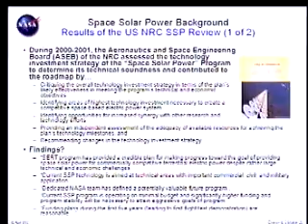A quite significantly different result than had occurred in the 1979-1981 timeframe. In particular, the National Research Council, the Aeronautics and Space Engineering Board, looked at the overall technology roadmap. They did not consider whether there is a market for solar power satellites, or an in-space market for high levels of solar energy in the Earth's neighborhood or the inner solar system.

They only looked at the credibility, the feasibility, the kinds of cost numbers, the programmatics of the strategic research and technology investment portfolio that we had articulated, with this steady stepwise progression of clearly identified and individually valuable demonstrations over the next decade or two. Their findings were that it was in fact a credible plan, that it did allow you to make progress towards the goal of power for terrestrial markets, and that it did so in such a way that it had significant, potentially important applications with civilian,

military, and commercial applications, and that a flight demonstration was a reasonable way to focus the conclusion of each round of technology research and development. That is, rather than making progress in the laboratory indefinitely, at the end of each cycle of innovation you should pull these new technologies together, put up or shut up, and get them into a flight demo at increasing levels of power and increasing levels of technology.

So where are we in terms of achieving the goal of terrestrial power? Where we are at the moment is basically far from it—that is, achieving power at a competitive price. Now, this is setting aside the question of whether or not over the next several decades, due to a variety of factors, the cost of energy were to somehow become significantly higher.

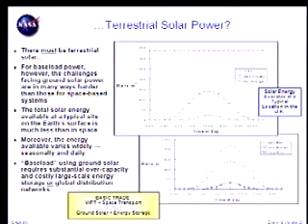Terrestrial power, solar power, there's the argument associated with the insolation. This is all going to be in the package that you'll have available on the website, so I won't go into it at length. The basic argument being that if you can compete effectively with terrestrial energy storage, then solar energy from space becomes a viable candidate. And if terrestrial energy storage becomes dramatically less expensive, then you don't. And that's just a straightforward trade.

Low-cost launch, this is another discussion for the break. The fundamental issue with any transportation infrastructure is traffic. If you have only one car going across the Golden Gate Bridge, you can't afford it. And so it's a chicken and egg situation.

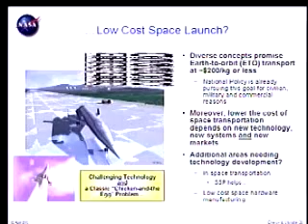You never have low-cost launch without large markets. You never have large markets without low-cost launch. We believe the stepwise strategy that we've envisioned, in fact, goes some direction to getting to an evolutionary path that gets us to the chicken and the egg more or less simultaneously.

And the safety of power beaming, you can't see this very well. We're continuing research here. So far, all of the studies suggest that microwave transmissions from space are dramatically less dangerous than sunlight. Certainly the wavelengths are such that you don't induce bond breaking, and you don't get cancers induced. You get thermal effects if you're at the center of the beam, which you can protect from.

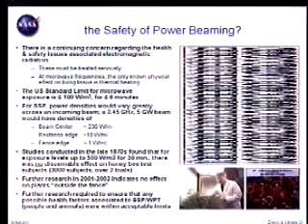At the edge of the beam, the power levels are well below the U.S. safety limits, most of the international safety limits except for Russia. And we're continuing research. Basically, the studies so far suggest that for both individual fauna and flora, that there are no noticeable effects due to the microwaves, other than the fact that the flora like it. They grow more quickly.

So there's a lot of work has been done. There'll be more material in the backup charts that you can take a look at. It does appear that technically space solar power is quite viable, providing extraordinarily large, certainly hundreds of gigawatts, potentially many terawatts. Depends on the size of the transmitting system and the type of orbits that you can place it in. We've made a lot of advances since the 1970s.

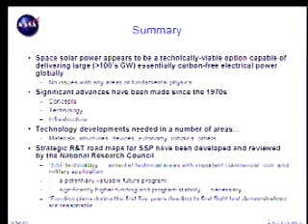We believe that there are very strong space applications for the component technologies and the systems which lead to an evolutionary roadmap that might in fact allow us to get to the point, not today, not in 5 years, not in 10 years, but at a point in the future where we could in fact decide whether or not these were systems that we wanted to add to the energy mix during the coming century.

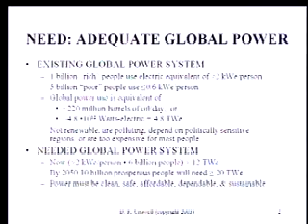Right now, we have an existing global power system that supplies 1 billion rich people, we're rich, with the electric equivalent of about 2 kilowatts electric per person. That leaves the other 5 billion poor people with about 0.6 kilowatts electric per person. This is equivalent, when you multiply out all those numbers, to about 220 million barrels a day of oil, or about 4.8 terawatts electric. And I'm just using a factor of 3 conversion from thermal to electric.

What I'm trying to do is put as much of this stuff in the same set of units as possible, to reduce billions of barrels and millions of cubic feet, and all those conversion efficiencies, down to a common term: terawatts electric or terawatt electric years.

Now, the problem with the existing systems is that they're not renewable, they are polluting, they depend quite often on politically sensitive regions, and they're too expensive for 5 billion people.

A needed global power system is one in which we provide at least 2 kilowatts electric per person. So right now, 2 kilowatts times 6 billion people gives you about 12 terawatts electric. A terawatt is 10 to the 12th watts.

So we have a problem right now. We've actually had a problem for 100 years. By 2050, with 10 billion people, we may need well in excess of 20 terawatts electric. This is about a factor of 2 more than the largest number you've seen so far from Marty Hoffert and others who work on derived data from IPCC or from the World Energy Council reports.

Now, this power must be clean, it must be safe, it must be affordable, it must be dependable, it must be sustainable. That means century after century after century, you've got to keep supplying it.

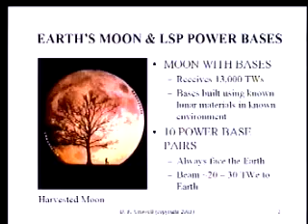They would be built in pairs on the two edges of the moon, so one or the other was sunlit. During a new moon, you would provide power by having power lines across to the back side of the moon, about 500 kilometers to the far side, where you'd have photovoltaic arrays connected by power lines bringing power back to the earthward side. That way you'd have continuous power out of one side or the other. The only time you're out is during a full eclipse of the moon by the Earth.

The same face of the moon always faces the Earth, so these arrays can be relatively static. I'll get into their nature, but this would be an example of a harvested moon. The bases are built using known lunar materials in the known environment.

Now, going from the Earth and looking to the moon, and looking back from one of those bases to the Earth, the Earth always stays within a couple of Earth radii of the same location in the sky. So the Earth is more or less fixed in the sky.

A given base is composed of a power plot. A power plot is composed of solar arrays—that's number one—which might be the area of the size of this room, as in the prototype model I'll be talking about in the next few minutes. These arrays would be sitting directly on the lunar surface.

You've got no air, no water, no chemicals to attack them, so things a fraction of the thickness of a sheet of paper can last there for decades. But you're building essentially very thin films directly.

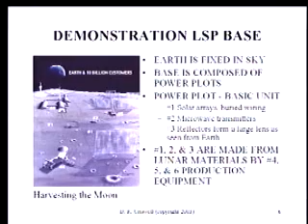The bottom line from that was that, assuming the same operating technologies as the 70s power satellites, you produce 50 times more installed power than you did shipping satellites up from Earth. So a factor of 50 advantage in productivity makes the whole thing much more interesting.

Now the next slide I'm going to show you goes past the demonstration, and assumes that since you now have access to substantial electric power on the moon in various locations, and the ability to work with the common soils and metals in them, the glass and the production, with careful industrial design you can design the production equipment so you can make about 90% of that out of local lunar material.

This is the second step up, and what's important about that is it lets you get into exponential growth. A ton of material taken from the Earth to the moon in the form of production machinery and manufacturing capability then results in several thousand times more energy delivered over a life cycle back to Earth.

Now we've modeled this in terms of a life cycle for a power system. We took, from the first, a relatively long view.

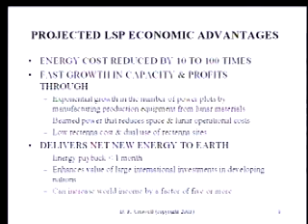It would enhance the value of large international investments in developing nations, because you would now have the energy to start creating wealth—somewhat like what happened with TVA or Bonneville in the U.S. back in the 30s. And if you can increase wealth in direct proportion to the amount of electric energy you bring in, it's reasonable to expect world wealth to increase by about a factor of 5 by 2050.

Considerable environmental advantages to this. There's absolutely no greenhouse gases, or essentially trivial amounts. Fuel spills, nuclides, dust, industrial waste—they're just not there. It eliminates the need for hazardous facilities. The rectennas themselves are aluminum and silicon, and can certainly be recycled if you have to get rid of them.

This is extraordinarily important as we are now a race that operates on a global scale. 20 terawatts is equivalent to 60 terawatts thermal. The geothermal output of the entire Earth is only 30 terawatts. We actually move more material by man's actions than nature does—Mount St. Helens, when it blew, was equivalent to 6 weeks of industrial output of terrestrial society.

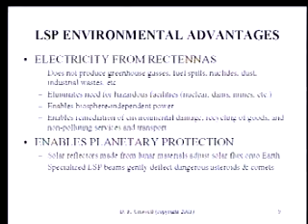It then enables us to have a source of power that is independent of the biosphere. This, with access to independent biosphere power and net new power, enables us to remediate past environmental damage, the actual clean recycling of goods, non-polluting services and transportation, and it enables planetary protection. I won't get into that right now.

There are very interesting possibilities with respect to nanotechnology and energy in this. First, addressing the terawatt barrier: the moon has a potential of 13,000 terawatts, and I think we can tap more than a terawatt electric within 15 years. We thought of this back in the late 70s, early 80s, and it was clear to us that there were no technology barriers.

It's basically an interesting industrial engineering challenge of producing thin masses on the moon, and then later getting into the manufacturing of production equipment on the moon. That gets you into exponential growth.

Nanotechnologies may enhance this growth rate and lower the transport costs. Tethers are a point of particular interest for low lunar orbit to moon transport. Another interesting aspect of this is that space and the moon provide a safe environment within which to demonstrate nanotechnologies without worries about biological interactions.

Cost issues—well, I see this as analogous to what the U.S. has been doing for many years, from when George Washington built the first canal out to his property. The government must return to the moon. We could certainly do that within 8 years with a focused, disciplined program. It would be like putting in the interstate highway system.

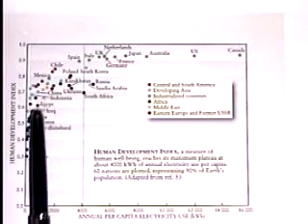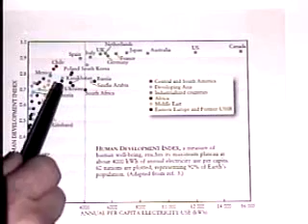This provides context relevant to looking at the upside of nuclear power. What this shows, a bit hard to read, is basically the United Nations Human Development Index, an indicator of quality of life, plotted against annual per capita consumption of electricity. The message is that above around 4,000 kilowatt hours per person per year, one sees essentially the OECD, then with a steep decline below this plateau, one sees the rest of the world, with gradations from China at about 1,000 down to Ethiopia approximating 0. The message of the next 50 years is presumably to see these countries marching up this curve towards a higher Human Development Index. However, as they march up that curve, there are a lot of people in this part of the curve—China, India, Indonesia, Yemen, number 18 in the UN projection for 2050, et cetera.

As they march up, it would be not very sensible to treat all of them in the same way as candidates for being part of the expansion of nuclear power. So as I come to discussing what we believe is a rational scenario to address the terawatt challenge with nuclear fission power.

We can't discuss all of this, but we will be having a scenario that folds in many factors, including urban population, technical infrastructure, opportunity for the kind of capital investment required in nuclear power, et cetera.

Now, the terawatt challenge for nuclear fission power, if we take a terawatt of electricity capacity, I want to stress that is approximately maintaining market share, global market share for nuclear power. Let's call it 20% plus or minus a bit. So we're talking about market share preserving if we're going for a terawatt.

We've heard a couple of speakers, most recently Nate, talk about 10 to 30 terawatts. I will be stating as a conclusion of our analysis that we don't believe that, even though it does not violate the laws of physics as perhaps some other technologies he discussed did, it violates various laws of economics, et cetera. In fact, we will argue that a terawatt scale, maybe 1.5 terawatts, is about the maximum that you can actually imagine happening.

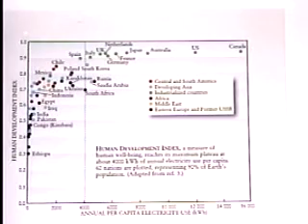So the terawatt challenge in nuclear power is a little bit different in a certain sense. We will argue it's a scale at which one does have a reasonable impact on important problems, avoiding a reasonable amount of carbon emissions, for example. On the other hand, we will also argue that you really can't expect to do more than that, even if you ever reach that kind of scale. So that's part of the context.

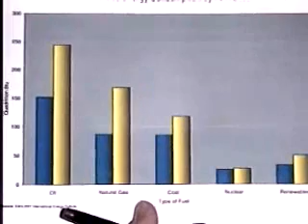With regard to the market share argument, let me remind you of world energy consumption by fuel source. This is hard to read, but it's fine. Bottom line is, I'm just repeating things you've heard in different ways. The non-carbon sources today, the blue bars, are about 15% of global energy use.

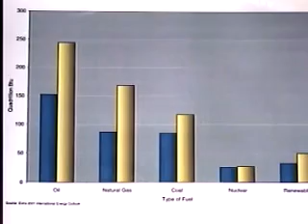If one takes as a guiding framework that, say in 2050, one has twice the primary energy use, which probably is on the low side of the scenarios, and that fossil fuel use cannot exceed where we are today in terms of various stabilization scenarios, roughly speaking, then you see immediately we're talking about an order of magnitude increase in non-carbon sources. That's the kind of challenge we're talking about.

And I'm not going to be arguing that nuclear fission is the answer for that gap, but as a contributor, a non-trivial contributor, potentially. That's kind of the framework for the discussion.

Now, let me turn back briefly to this issue of the demand map, where, as one looked at that first curve, as countries move up that curve in terms of providing more electricity to improve the quality of their lives, their economies, et cetera, where might that be? I will not be able to go through the analysis supporting this other than to mention various factors involved. But there's often stated the idea that somehow a major global expansion of nuclear power in the next decades would see nuclear power proliferating all over the developing world. The fact is, when you look at it, that is not a credible scenario.

This is one scenario for the terawatt electric, and what you see is, frankly, there's no way the world's going to reach a terawatt if the USA isn't driving the train. Developed world and FSU, about two-thirds in this scenario, about two-thirds of the capacity. Developing world, the remainder. China and India, the big horses in the developing world. And then in this scenario, about 100 gigawatts - Indonesia, Brazil, Mexico, South Africa, Algeria, et cetera.

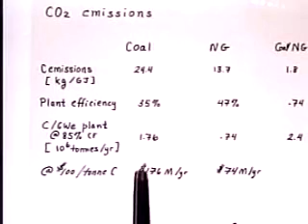That's the scale. So in the terawatt scenario, if you're looking at coal as one of the major elements of growth in electricity over the next half century, you'd be talking about 1.8 gigatons, and if it were gas, 0.75 gigatons - you can dial whichever linear combination you wish in between. So that's the scale in terms of carbon displacement in that terawatt scenario.

Okay, so how do we get there? What's likely to drive one there? Well, first of all, a factor which was not highlighted consistently in many of the technology discussions as primary is economics. It's very important that we look at the economics.

Now, what I'm going to present is the result. Nate showed a price of electricity per kilowatt hour of nuclear at 2.3 cents - that is true today because of amortized plants. The relevant issue here is what is the cost, in a merchant plant model, of building a new nuclear, coal, or gas plant.

Now, I won't go through all of this, but let me point out a few key parameters. Probably hard to read, it's okay, I'll tell you what's important here. These are our base case input parameters for nuclear, coal, and gas. There are several important issues here to which I will return.

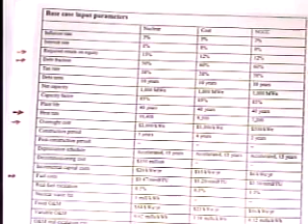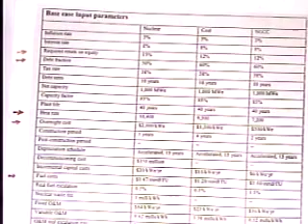Number one, capital costs - the overnight costs. I want to stress this is based upon research and hard-nosed experience, not upon promises - neither promises of the NEI for nuclear, nor your favorite coal person for IGCC or anything else. This is experience. Maybe one can beat this, but let's start with experience.

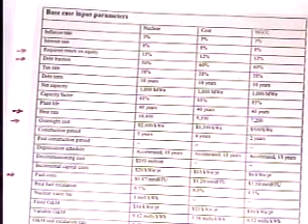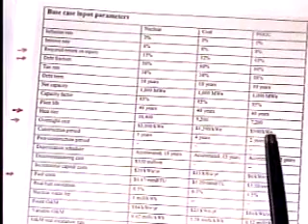Overnight costs: nuclear plants, $2,000 per kilowatt - considerably less than the Japanese have spent for their last plants. One plant may have beaten this, the Koreans - exchange rates come in, but it's fair to call their last plant as built at around $1,700 a kilowatt. We have gas at $500 a kilowatt for a combined cycle gas plant, and coal at $1,300, including all environmental cleanup equipment other than carbon, all the standard pollutants.

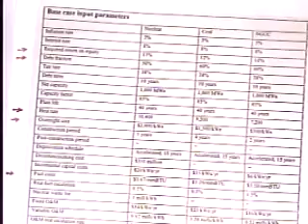Capital costs are a big issue for nuclear power. Fuel costs - I won't go through in detail, but it's the opposite: fuel costs for nuclear power are extremely small. Heat rate is unfavorable again to nuclear power: 10.4 versus 7.2 for natural gas. In other words, natural gas is about 47% efficient in our calculations, nuclear at about a third.

And finally, very important - if you want to be serious about who's going to give you money to build a plant, what do the bankers or investment community think about the cost of the money? It's not the same for a nuclear plant as it is for a gas plant. So when you look at debt fractions and return on equity, it's unfavorable for nuclear power. All of this is folded into our calculations. So what comes out?

Here's the base case. With those assumptions, nuclear power comes out at 7 cents a kilowatt hour. Pulverized coal, 4.2 cents. Gas at $3.80 over the period of the plant, 3.8 cents.

Gas, of course, has considerable uncertainty. Gas is driven by fuel cost. It's exactly the opposite of nuclear. The gas costs are maybe not something one wants to count on for a 40-year investment in a plant, so there is considerable variability there.

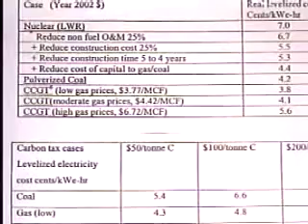Very importantly, if this terawatt challenge is to be met by nuclear, you've got to get the 7 cents down. Here are some steps.

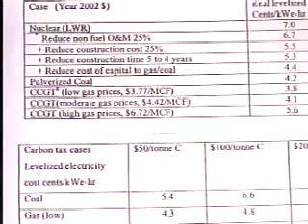O&M, operations and maintenance reduction. What we've put here is actually the current performance of the best performers, so that should be achievable, in principle.

Construction costs, critical. 25% reduction to $1,500 - very important. A big drop in the costs.

And then finally, the cost of capital. If the cost of capital for nuclear power were the same as for gas and coal, it makes an enormous difference. With those, you could be down to 4.4 cents.

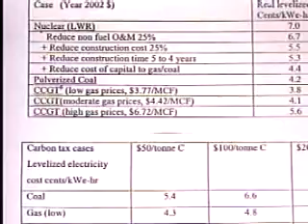So these are very important economic issues that are going to determine much of the nuclear power trajectory. Another one, of course, is the externalities, as we have discussed, in carbon.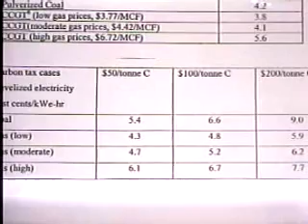If you now put carbon, however you do it - I don't care what the mechanism is - but if in the end you end up paying somewhere between $50 and $200 a ton of carbon, not carbon dioxide, of carbon, then as you can see, the coal and gas prices are impacted significantly.

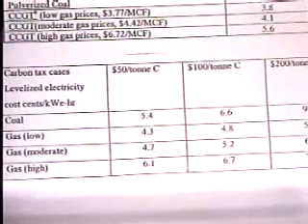Bottom line is, there are a lot of uncertainties here. Nuclear power might be in the game as a serious economic competitor in terms of at least life cycle costs if the nuclear community works hard at capital costs and can get some confidence in the investment community, and particularly if carbon externalities are one way or another put into the equation.

Now, what I said was our study is kind of looking at the issue of costs being critical. How would one enable this? Again, this is not necessarily a statement or prediction of what's going to happen in Congress next year, but how would one enable this?

First of all, look in the context of a carbon avoidance government incentive portfolio. We have tax credits for efficiency, hybrid cars, whatever. We have a program on coal and sequestration, FutureGen plus sequestration. That's what that area needs - a serious research and demonstration plant and sequestration, tailored to that.

You go to renewables, let's say wind - you have 1.7 cents per kilowatt hour for 10 years, which, by the way, is a humongous subsidy. For a gigawatt electric plant equivalent, that's $140 million per year credit.

If you go to nuclear, what one probably needs, if one wants to give this a kickstart, is an upfront cost sharing of what you would call first mover costs. Because right now, there's a good chance those capital costs could be real, but you can't get over the first hurdle to start building a new group.

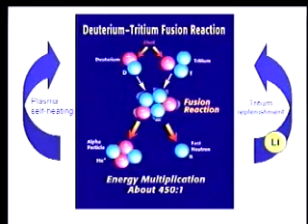So I'll tell you about fusion energy. My particular expertise is in magnetic fusion energy, holding on to hot plasmas with magnetic fields. The basic process most likely to be successful in the nearer term, meaning this century: deuterium and tritium combine to make an alpha particle. That alpha particle has 3.5 MeV, which keeps this stuff hot. They also make a fast neutron. You capture that in lithium, and that provides the tritium, so you have 2 cycles that you need to keep going to make fusion work. And out comes electricity, and perhaps hydrogen, although I don't think that's a near-term option.

So why is it that you would be interested in this? We've heard that there are a lot of disadvantages and problems with all the different sources of energy. Right up front, the problem with fusion is that it is not at this time practical. I'll say that maybe 3 times in the course of this view graph - once at the beginning, once in the middle, once at the end.

But if we can make it practical, it has plenty of fuel. It's available to all nations. There's at least thousands of years' worth of this fuel, probably millions. It has no carbon emissions. The radioactivity, as I'll show you in a view graph, is relatively short-lived. It can't blow up. It's resistant to terrorist attack, essentially because there's very little fuel in the chamber at any given time, and it has very little afterheat.

There's low risk of nuclear materials proliferation - I don't say no risk. You don't need to have any fissionable materials in a nuclear fusion reactor. There are neutrons - you could, in principle, breed nuclear materials, but it would be a matter of kilograms of nuclear materials being detected out of zero, rather than out of many, many tons. So it is a relatively easy thing.

But now this is the time for me to say, it doesn't yet work in a practical sense. It's compact relative to solar, wind, and biomass. We've seen land usage - people seem to think that giving up Arizona really isn't that much of a problem, but you probably ought to talk to the folks in Arizona. It's not subject to daily, seasonal, or regional weather variation, nor does it need to be located near a place where you could sequester carbon dioxide. So that gets you away from large-scale energy storage and long-distance transmission.

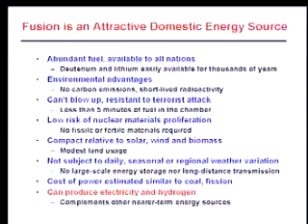We've looked at the cost of power. Of course, this is something that maybe it's like what Ernie was saying - it's a class of something that you can estimate what it could cost if you can do it, and we don't yet know for sure we can do it. But you can get to 5 cents a kilowatt hour kinds of electricity costs. And you could, in principle, create hydrogen - you can certainly create electricity if you can do it. Once again, it complements other nearer-term, now working energy sources.

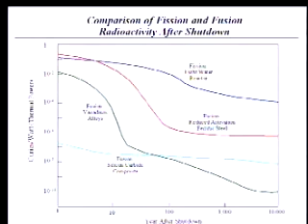Years after shutdown, here is nuclear fission, and you can see that in 10,000 years you get to a certain level that people are beginning to worry about, but you get there in sort of a human lifetime from even the worst of the fusion materials we're looking at. So you've kind of changed all of human civilization timescales into human lifetime timescales.

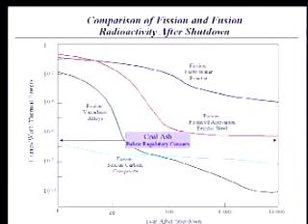And while we're talking about coal ash, it has some radioactivity. Actually, its radioactivity doesn't decay at all in this time period, right? It thinks in millions of years, coal ash. But the radioactivity from the coal ash you're planning on piling behind your power plant is comparable to the radioactivity from fusion, again, in sort of a human lifetime. So you could imagine some local storage, even recycling of these materials, particularly the more advanced materials from fusion. So it's a somewhat different question, I think.

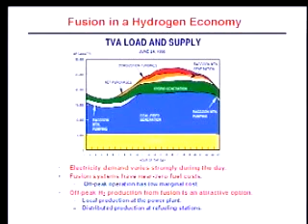Fusion systems have near zero fuel costs. The deuterium and tritium are really nothing. There are parts that wear out. But the off-peak operation therefore has very low marginal cost. And so you can do hydrogen production from the off-peak operation. Say you're operating here conceptually. This is your off-peak production.

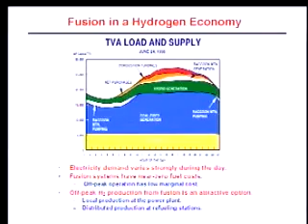You can do local production. You can imagine thermal production, for example, or electrolysis. But actually, I find the most interesting idea, so that you don't need a hydrogen distribution system, is to use the fact that the grid is also not doing too much at that time. Send the electricity out to the, quote, gas stations and make them gas stations where they deliver the hydrogen. And it's a funny sense in which steady things, like regular fission also, can use this idea of hydrogen for peak shaving in the inverse of the way that wind uses it, and in fact, perhaps even more efficiently.

Now, these are charts you've seen many of. This is the anthropogenic emission versus years. This is the buildup of carbon dioxide. It's hard for me to read at this angle. I think this is probably the 550 case. Okay, and you can see it takes sort of 50 to 100 years to level off, a couple hundred years if you get to some of these, frankly, more realistic cases that we're headed to.

There are a couple of different scenarios. The IPCC scenario you saw in a few talks, the WRE scenarios you saw in other talks. What the WRE scenarios do is, they're more economic in that they allow the carbon dioxide to grow a little bit earlier and then level it off harder later. And now you look at these charts and we get ourselves really quite wound around the axle about 2050. Depending which of these curves you take, there's a lot of energy in that difference.

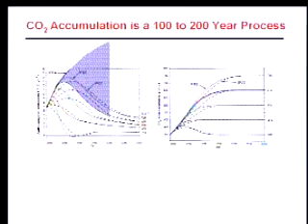But what I want to look at is the longer term picture. And the longer term picture is indeed that there's a big problem in 2050. And this is a 650 scenario. You have to understand that the forcing function is logarithmic in the amount of carbon dioxide in the atmosphere. So 650 is worse than 550. And there's about a factor of 2 difference there, depending on that choice.

And then you can also go down to a larger difference if you choose, for some reason, the IPCC scenario. But all of these, actually, where there is not uncertainty -- Jerry Mahlman, who's director of the Geophysical Fluid Dynamics Lab, or was director there nearby us, pointed out to me -- where there really isn't uncertainty is out here. It doesn't matter what scenario you take, you need just humongous amounts of energy.

So here's a picture. Here's what these look like. This is an economic analysis that points in this direction, that we need to be worrying about this 2050 and beyond kind of timescale. And indeed, here's just a look at fusion. This is estimated total primary energy consumption from the IPCC. I'm including things that are off-grid here to get total energy. If you just say, I want the 650 ppm WRE scenario, you're allowed that much carbon-based energy production at today's carbon intensity, or slightly reduced for this.

And what you can see is that fusion is a little late on this scale. This doesn't come to 10 terawatts. Again, if you take the other scenarios down the chart, you ask for 550, you ask for the less economically attractive IPCC scenario, you can get it up above, a little bit above 10 terawatts. But fusion with a reasonable growth rate -- this corresponds to about 1 in 10 power plants being replaced with a fusion power plant -- grows up here.

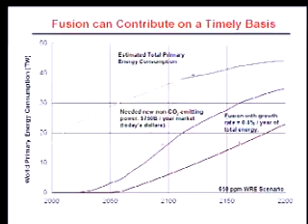Someplace up here, if you're going to contribute this kind of amount of energy, you have to be contributing to transportation. I don't think you're ever going to use electricity for heating purposes - that's really tremendously impractical. But you can make significant contributions if, with nanotechnology and pushing harder than some scenarios we've developed, you move that back a decade, I can meet your 2050 goal on your chart. But I think you also have to think in the very long term, because that's important.

You're going to need concentrated energy sources, because world population growth is going to be in cities and megacities. So what is this all about? What are we doing? Well, as we've heard, the sun is a fusion power plant. It uses gravity to hold this very hot gas together.

In nuclear weapons and in inertial confinement energy, which I won't talk about so much, you use very energetic pellets and very energetic beams to compress a pellet and heat it so that it fuses before its inertia lets it explode - that's why it's called inertial fusion energy.

But what we do in Princeton, and what is the dominant process being looked at for energy around the world in a very aggressive program, is you use magnetic fields which cause hot gas plasma that's been ionized to spiral around that magnetic field. Then you close that magnetic field on itself. The plasma spirals around this magnetic field - it can go for hundreds of kilometers along the magnetic field before it moves centimeters across. It's a tremendously effective way of holding this very hot gas in place.

In fact, we've been to temperatures of about 1 billion degrees Fahrenheit with these gases and held the plasma there at those temperatures for many seconds. So this is a tremendously effective way of making these very hot gases.

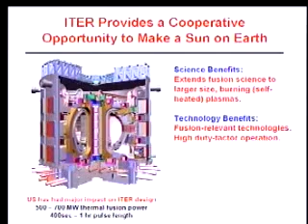So the way that the international folks look at this, the international group working on this that now includes us, is to demonstrate the scientific and technological feasibility. It's not going to show that it's economic yet, by producing industrial levels of fusion power.

So we're very excited about this international opportunity. Where does it stand? Europe, Japan, Russia, Canada have already been negotiating about this. The US and China have now joined. South Korea has made an offer. We'll see whether it's accepted by the whole team. There are 4 sites on the table: northern Japan, Canada near Toronto, Spain, France. With the US and China, and probably now South Korea, the numbers may add up. Europe has talked about putting 53% on the table, and Japan has talked about 17%, and under those circumstances you don't take too much from everybody else to make it work out.

Key issues are to resolve siting and cost sharing. This is a major international construction project. I should talk to my friends from NASA about the ISS. That seems to have been a challenge to keep it on budget and schedule. So that's going to be a major issue. Risk allocation is an issue. How do you handle contingency? Europeans can't translate the word contingency in English into European. So we have some work to do with them, because that's got to be taken very practically.

Now, there's more work to be done in parallel with ITER to make fusion practical. The configuration of ITER is what's called a tokamak. It requires a current to flow in this plasma. You need to come up with ways to drive that in steady state. It also, I showed you, it makes about 500 megawatts. You need a real power plant to be a little bit smaller than that, and to make 2.5 gigawatts if you're going to reach the kind of economic challenges that Ernie talked about. So you need a higher pressure plasma in there, and that's what you get more fusion from. And so there's some work on active instability control to do that we're doing in the United States.

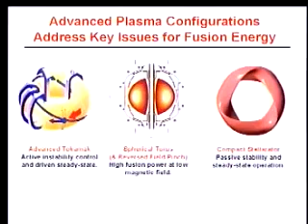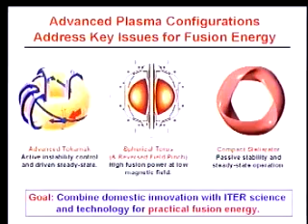So a question you could ask is, gee, if that's what ITER is and you need to look at some other options, why are you building ITER? And we struggled with that. We had one of these Snowmass meetings like the high energy physics people do, following some earlier analyses, a come-to-Jesus meeting. And we struggled with that question, and we argued about it, and the folks who are advocates of these other configurations talked, and we came to the conclusion that if we do domestic innovation along with ITER, then we can get there. And in fact, ITER will provide most of the science and most or all of the technology you need for the other configurations to be able to move forward towards a demonstration power plant. So that was a bit of a struggle, but that was the technical conclusion.

So this range of toroidal configurations is being studied worldwide. Here, I'll only show a few. This is in Europe. You see the man stands about a third of the size of the tokamak in Europe. Here is the tokamak at MIT, and they hire giants there apparently.

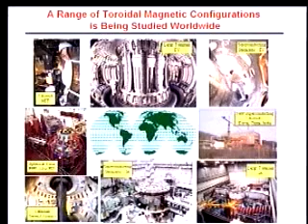Korea, China, and India are each building $500 million fusion facilities. The stellarator, the configuration that varies around the torus, has billion-dollar facilities both in Europe and Japan, plus some nice facilities at Princeton, where I work. I won't get into that.

What are the areas of technology that are critical for fusion energy? Let's start with this hot plasma in the center—that's my job, that's the physics.

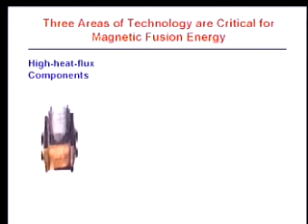But what about what we can do moving outwards? There's heat that comes out—20% of the fusion power comes out in the form of heat. 80% is neutrons that are absorbed in this lithium blanket. 20% comes out as ultraviolet radiation and energetic particles. You have to capture that on the surface.

This is not a very good reproduction, at least from where I stand, of a tungsten mesh—sort of a brush of tungsten that can take 25 megawatts per meter squared in steady state, developed for this purpose. It looks very attractive. You need this tritium-generating blanket.

Out come the neutrons, and you want to absorb the tritium. You want to have things in here like silicon carbide that allow you to run very high temperature coolant, say lead lithium. You've got to have a system where the parts damaged by the neutrons can be switched out quickly, and you want it itself to have low radioactivity.

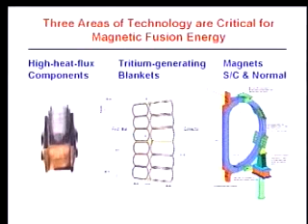And finally, as you work your way out in magnetic fusion, eventually you get to magnets—superconducting, or in some configurations, normal magnets. They have to handle high magnetic fields, have very low dissipation, and they have high stresses on them. In the ITER configuration, it's about 12 Tesla at the highest field point, for example. And you want to be able to build those cheaply.

So what are the specs on these things? For high heat flux components, if we can make 25 megawatt per meter squared components reliably, tungsten is an okay material. It would be great if there were a carbon-based material that could be used there because it's really zero radioactivity. It's got to be able to withstand about 5 megawatt years per meter squared of neutrons.

The tritium-generating blankets have to handle a higher neutron flux because they're right up against the plasma. You'd like to get up to 1,000 degrees C, for the obvious usual arguments.

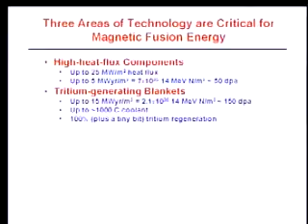And you need a little bit more than 100% tritium regeneration. It's actually not like a fission breeder—the residence time of the tritium in the system is only a few hours, not years, so the reproduction time is not a big issue. You just need a little bit more than 100%.

Magnets, superconducting and normal: the highest field possible from the physics point of view is desirable because fusion power, it turns out, scales like the 4th power of the magnetic field. So you guys help us with superconducting magnets that can go to, for example, 20 Tesla at 1,000 amps per square millimeter in the non-copper part. That would change the picture dramatically. All of a sudden, the cost of these systems just plummets. About half the cost is in the magnets.

We need very strong structures. The weight of the structure is not important for us—the volume of the structure is important. We need super strong support structures if we're going to go to 20 Tesla. You want to change the world.

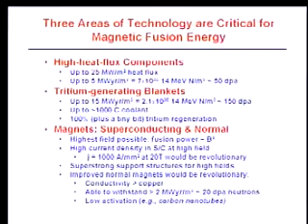Another way you can do it is improve normal magnets. If we don't need all the shielding required for superconductors, you can handle a significant amount of heat, bring the magnets closer to the plasma, and push up the efficiency of the system rather dramatically.

If there were a material out there whose conductivity was copper or higher, that was able to withstand, say, 2 megawatt years per meter squared of neutrons, that was low activation—once you get past those numbers, you have a dramatic impact again on the cost of electricity from fusion and on the rate at which you could bring it online. So there's some pretty exciting things.

I thought I'd put some numbers on the table, just to talk about some of the things that have been done. The ferritic steels that were used for breeder reactors had in them materials that are not good for fusion.

You don't care about the moly in a breeder reactor. The fission products have killed you already, way before you worry about the moly. But if you swap the moly for tungsten, you're in pretty good shape in terms of radioactivity, a huge advantage.

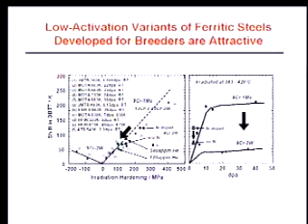Big win on brittleness too. The steels we've developed with a more modern nano approach to materials technology have better fracture toughness and better thermal conductivity, some very attractive properties. There are nanocomposite ferritic steels that look like they can go way out on stress versus temperature curves compared to the older oxide dispersion strengthened steels.

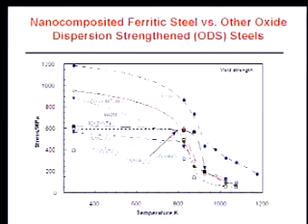These need to be tested in a neutron environment. We need to understand the ability to scavenge, in particular, helium that gets produced from the higher energy neutrons from fusion. Here's a chart about what's needed.

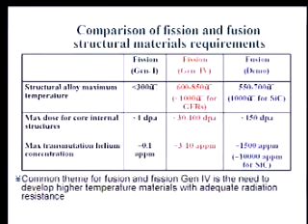I can see I'm getting to the end of my time. The big issue for fusion in materials: the amount of DPAs are similar to fission Gen 4, and indeed we've tested materials to these kinds of DPAs and they look okay. The real issue is that you get significant helium production. You need energetic neutrons, and if you get energetic neutrons from fusion, they cause transmutation, producing some helium. You have to worry about the helium buildup in the materials.

The Japanese think this is okay in their analyses. We also think it's okay, but you've got to test it. You want to do simulations to understand that.

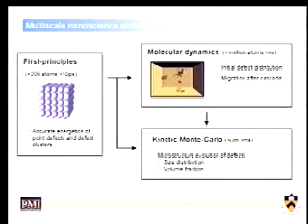First principles calculations—this is actually a group in Princeton, not part of my laboratory, doing this. You want to understand the effects, the energetics of defects, and how those defects can migrate. Then you put that into your Monte Carlo studies and work your way up to the macroscopic structures of the system and its strength.

You want to test that ultimately in a 14 MeV neutron environment, typically a D-Li stripping cell. You need to do this relatively quickly so you can bring fusion online. This is part of the development path.

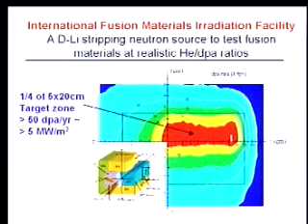So in summary, if we can make it work, I think this is an attractive energy option. Progress has been rapid, but it's limited by budget constraints.

Let me tell you a story. In 1980, the Fusion Engineering Act said let's have a demonstration power plant by the year 2000, and let's triple the budget to do it. It turns out Congress has a great memory—they remembered the factor of 3, but they put it in the denominator. So we now have 9 times less funding than was projected in the Fusion Engineering Act of 1980.

But in fact, the amount of money we have spent today is the amount of money that in that plan would have brought us to the decision to construct ITER. So we're on schedule versus dollars. Progress towards it has been budget constrained.

Japan is spending about half again more than us. Europe is spending about twice as much as us. Probably one or the other will win the competition to site ITER. So there's a real issue that the U.S., if it's going to be competitive, has to grab some of the other things—we're not going to be building ITER.

Are we going to optimize the fundamental understanding of these plasmas, the configuration optimization? Here's ITER, which we have to be a participant in if we're going to compete in this market. How about some of the materials and nanotechnology issues—are there opportunities for us there so we can be leaders ultimately?

Nanotechnology is needed and is now being used already for the materials we need, and could have revolutionary impacts, particularly through magnet systems because of that B to the 4th factor. So thank you.

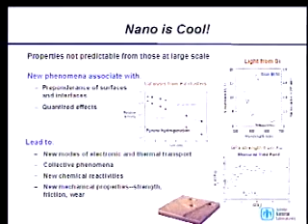What's really important is how do you take that nano property and translate it into a stoplight, or a first responder's ability to measure the environment around them, or into a better industrial catalytic process? This, I think, is one of the big challenges the nanoscience community has to face — coupling these small scales across to the length scales where these properties and processes will be important.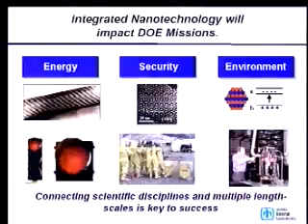When I was a young upstart at Sandia Labs some 20 years ago, strained layer superlattice was a very emerging topic of science. We were really doing a lot of the theoretical work to understand what these materials would do, messing around on the experimental side of making these on a laboratory scale.

Well, 20 years later, this is now a fully manufacturable material. And there are companies that build these, and in fact, when you drove here, you probably stopped at a stoplight made out of that nanostructured material, these funny-looking stoplights with all the little dots instead of the lens.

If I look at that kind of manufacturing capability and ask where do we stand in terms of nanocrystals or self-assembled membrane three-dimensional materials, I'd say we're at an extremely primitive stage. We're kind of where we were back at that 20-year point for the strained layer superlattice. So a lot of the important work here is picking systems where we can gain that experience and move rapidly along that curve, from a laboratory experiment to something you can really make and use.

Now let me show you a few examples of what can be gained from that. I'll look at these layered materials first, since those are ones we really have experience with. One application is building light-emitting diodes and lasers, like this one here.

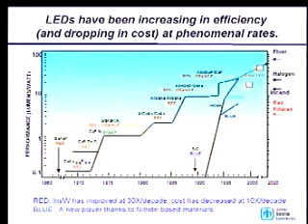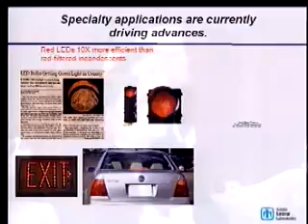You're seeing them in stoplights because they're 10 times more efficient than filtered red light, and they have lifetimes of about 100,000 hours. So there's two things about stoplights: one is they use a lot of electricity because they're on constantly, and the other is that it's a real pain to replace the light bulbs. So they make an excellent application here.

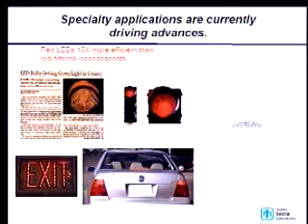But what's interesting is you're starting to see them in more specialty applications. They're replacing different design features in buildings. They're being used in different ways.

I think it's important to look at how new technologies move forward. I know when I first saw the handheld calculator, that was kind of what I thought was going to come out of solid-state microelectronics. I never envisioned how intimately involved my life would be in this technology in ways I never imagined. I think we're going to see the same kind of thing as this technology moves forward.

So maybe someday when you walk home, your house will sense the mood you're in and adjust the lighting to soothe your day or whatever—these are all things that are possible. We're using these incredibly inefficient lights up here because we like the character of the light. We didn't replace all these with fluorescent bulbs because we like this sort of soft lighting. This kind of technology is going to allow you to set in real time what that condition looks like, and do it more efficiently than what we have now.

So I think we're going to see not just replacing what we do, but opening new opportunities as well. Now, in order to get there is part of what's called the Solid-State Lighting Initiative. This is a national initiative, and in fact Sandia, Los Alamos, and Lawrence Berkeley Labs are working together on this to reach a target that would put solid-state lighting at twice the efficiency of fluorescent lighting we have today.

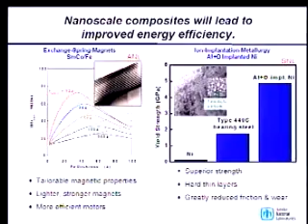Catalysis is another area where nano-sized particles appear to have real advantages. We heard in one of the talks yesterday that it would be nice if we could get the nitrogen out of our gas feedstock, because we form nitrogen oxides in a lot of this chemistry. That's because of the temperatures we operate at. If we can use catalytic processes to lower those temperatures, you can effectively remove the nitrogen side reactions without having to remove the nitrogen from the feedstock. So there are big environmental savings to be had here, and they seem to be focused very much on things at this nanometer scale.

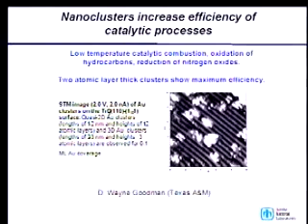This is work from Wayne Goodman at Texas A&M, which shows that these clusters of gold have very strongly peaked properties when they're just 2 layers of atoms thick. Can't say we really understand why that is, but again, at that scale, some fundamentally different things happen that don't happen for single atoms and don't happen for the bulk.

Nanoscaled texturing of surfaces. This is work going on at the University of Florida, looking at building electrode surfaces. These are going to be important for advanced batteries, capacitors, and fuel cells, where nano-sized texturing actually provides improved electrical performance of that conductive electrode interface. Being able to go from a laboratory experiment to really manufacturing stuff like this is where we have to go to make these savings really count.

So when I look at nanomaterials, I can see very broad energy applications. Going all the way from these layered composites, where we see a lot of the benefit right now in efficient lighting, magnets, low friction surfaces, to nanoclusters and nanotubes for hydrogen storage, artificial photosynthesis. These are kinds of things that people are really looking at seriously now. To the nanoporous membranes, which are really 3-dimensional materials that could be important in chemical separations, filters, and membranes for fuel cells. No limit, I think, to these kinds of applications.

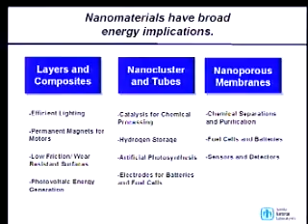The question is, what's it going to take to get from those materials to systems that really deliver that energy performance? One of the things I think we're going to find is very important is the ability to integrate different length scales together. There will be very few solutions which are nano alone — you don't just get a bag of nano powder and sprinkle it on your thing and everything will be good. The nano is going to be involved in some complicated engineering system, and it has to interface in how we manufacture it, how we get information in and out of it, how we get energy in and out of it.

I'll show this, though it's not strictly an energy example — this is a security example of what we call a microchem lab. It's a handheld chemical analysis system we've developed. In fact, these are deployed in subways and airports around the country right now. The whole device is about the size of one of our name badges. It has two full gas chromatographs that can detect and analyze parts per billion concentrations of nasty chemical things in complex backgrounds. All of the parts are really micro scale.

So there are micro scale detectors, preconcentrators, and separation columns. But what delivers the performance to this entire integrated package is the assembly of a nanoscale membrane which is attached to this preconcentrator. That membrane is made by a process we call self-assembly, where the individual molecular interactions actually drive the end structure. So we don't template that structure, it builds itself. And it can be controlled to the point where each of the pores is exactly the same size.

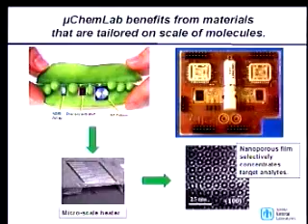So now when you're looking for a specific chemical, you can tailor that pore so it's the right size. And in fact, this nano membrane, which sits on top of this micro hot plate, provides about a 500-fold increase in the sensitivity of that overall device. If we didn't have that sensitivity, the whole device would be not applicable, not relevant, small potatoes to the problem at hand.

Now, it probably shouldn't be a real surprise to us that this kind of integration across length scales is going to be an important part of how nano gets used. Nature, you know, it's like the consummate nano thing. We are the nano thing, right? Every sort of basic molecular function and chemical pathway in biological systems has its roots in some nanoscale machinery. But the functions are achieved in living systems by integrating these different capabilities together over multiple length scales.

So these individual molecules assemble into larger structures of cell membranes and mitochondria. These guys assemble into larger yet structures that have more functions, like complete functioning cells, and cells assemble into tissues and tissues into organs, and pretty soon, you know, here we are.

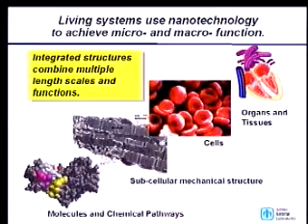What's really fascinating about it, in a way, is you get down to this level, there are machines that do really neat things. There are molecular protein motors that have 2 feet and they walk along a track. And they take a 8 nanometer step every time they move. Those little machines are, I mean, a fabulous engineering feat on itself. But what I look at is the fact that a collection of those machines allows me to do that through an integrated architecture that spans multiple length scales.

I don't think we're even close to understanding how to connect these length scales together. But to me, that architecture is going to be what really will be just as important as any other part of how nano evolves into something that makes a difference to the world we live in.

So now I'm going to take, since I have no time left, my commercial part of the message here. But just point out that you heard about it. Tom mentioned yesterday that DOE centers, and so did Dr. Russell, that there are a lot of centers growing up around the country around nano, and I think it's important to understand what these different centers might have to offer and how they're going to work together to go after these problems. We're developing one in New Mexico, which is joint between Sandia and Los Alamos National Labs.